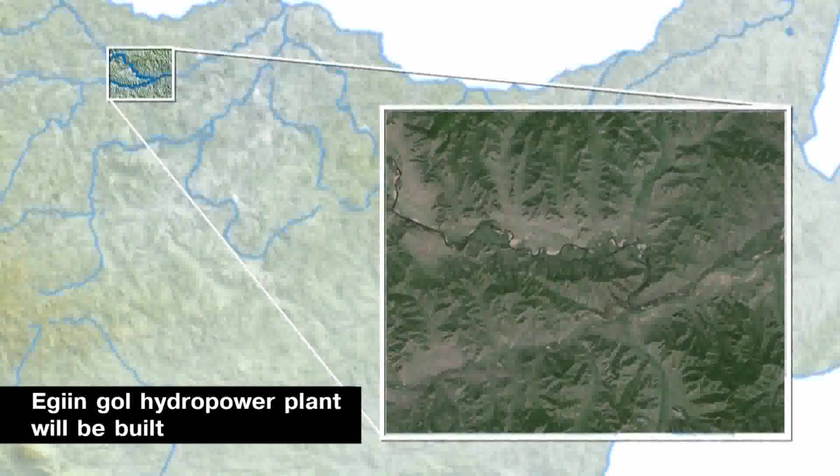The history of this project first started from the conclusion drawn by the Institute of the Russian Federation in 1964 to 1965 to build a HPP at 28 sites in Mongolia. One of them was at the end of the Egiin River, more than 450 kilometres from Ulaanbaatar in the territory of Khutag-Undur Sum, Bulgan province, located 2.5 kilometres upstream from the confluence of the Egiin and Selenge rivers, where this Egiin hydropower plant is planned to be constructed.

In 1997-1998, initiatives by Malaysia and Czechoslovakia to invest and construct a hydropower plant were not realised without being influenced by the Mongolian side. In 2007, an additional detailed environmental assessment was completed. A consortium of Sinomac and Kamaz companies participated in the tender, but decided to use the above-mentioned loan for other projects. On November 16, 2013, the Government of Mongolia decided to start construction of the Egiin hydropower plant.

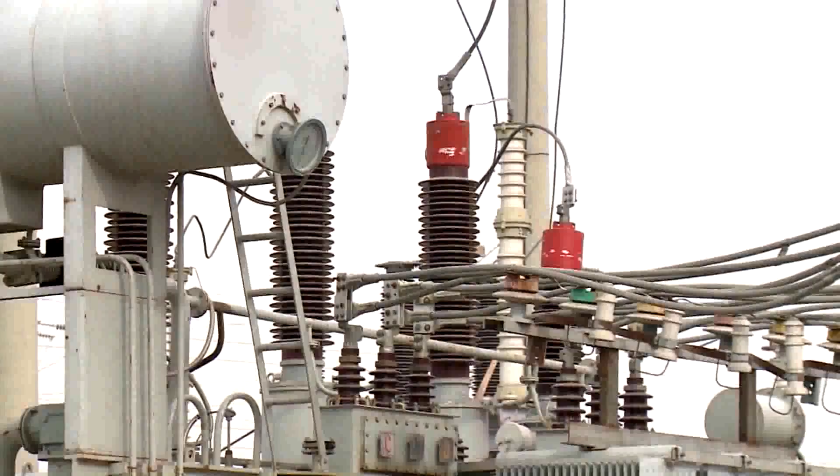Currently, daily peak load is 970 megawatts and the off-peak load is 650 megawatts. The difference is going up to 320 megawatts due to household-dominated electricity consumption growth. It is difficult to talk about independency of our energy system because we import expensive power needed for system regulation. Having constructed the EGPP, an independent power system of our country will be established in its real meaning, and we will be able to regulate our system and have reserve capacity.

The Federation has been increasing the price of electricity supplied from year to year. On average, we pay them US $24 to $25 million each year. Power Grid of the Central Energy System has already paid US $178.6 million to the Russian Federation for electricity imported from the Russian Federation in 1997-2015. If EGPP was constructed in 1997, the payment equivalent would be 64% of the construction cost of that time and would have been saved.

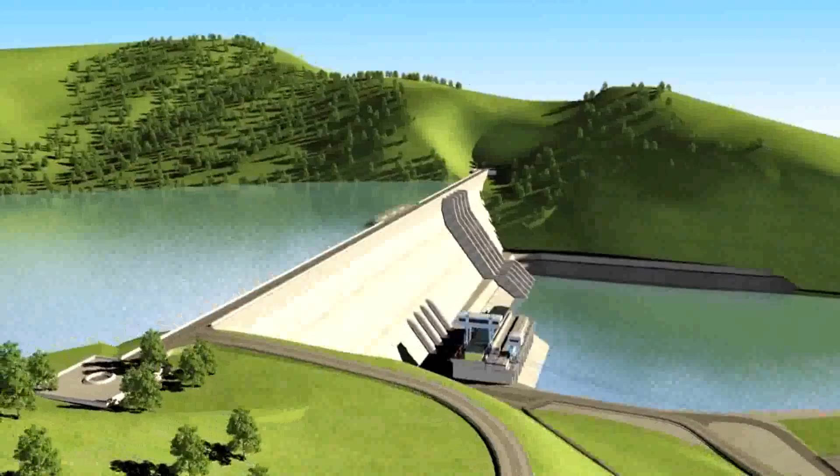After having constructed the 315 megawatt EGPP, it reduces raw coal consumption substantially and is of great importance to reduce greenhouse gases released into the air in Ulaanbaatar city, other towns and large suburban settlements by 709,000 tonnes per year.

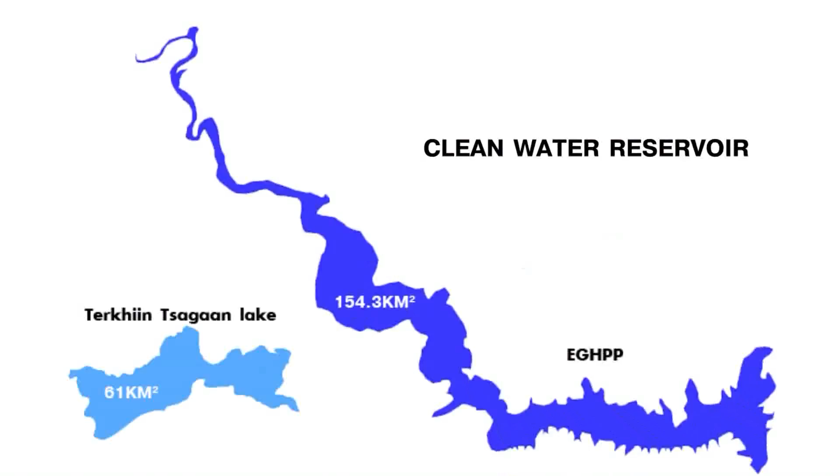Mongolia is one of the countries where desertification is intensified because within only the last decade more than 500 rivulets and creeks have dried up. Construction of the EGPP is a strategic project to ensure the nation's water supply security, creating clean water resources of 5.7 billion cubic metres volume, which is 2.5 times as big as Terkhiin Tsagaan Lake.

In fact, before 2013, there was no independent project unit, and specialists of the sectoral ministry were responsible in addition to their main job. The project unit consists of scholars, researchers and experts of all relevant fields. The historical obligation not to repeat lessons learnt and to successfully implement this project fell to the staff of the project unit.

The updated technical and economic feasibility study was carried out using US $1.5 million according to the agreement made in 2014 between the EGPP project unit and Tractebel Engineering France. But in 1992-1995, the technical and economic feasibility study was completed, funded by US $5.2 million, by Electrowatt LLC, Switzerland, Electroconsult LLC, Italy, and Uzny Airchim LLC, Mongolia. The reasons to update the previous technical and economic feasibility study completed in 1992-1995 are as follows.

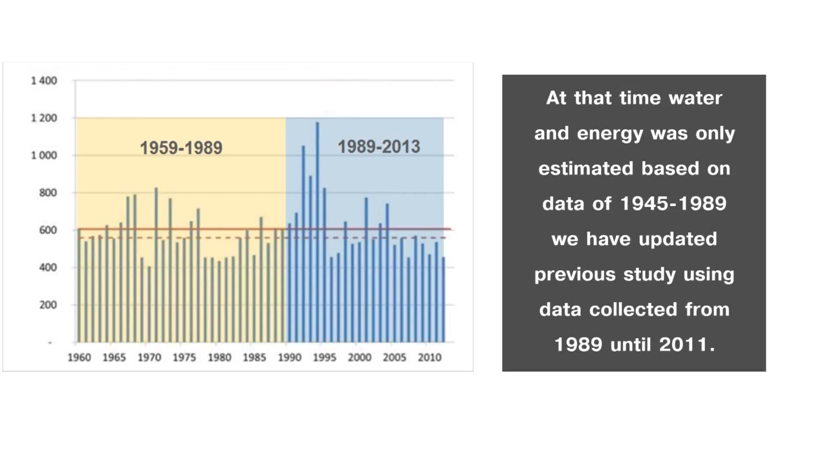Some studies were left out altogether. Apart from this, because at that time water and energy was only estimated based on the data of 1945 to 1989, we have updated the previous study using data collected from 1989 to 2011. The methodology used before for regional earthquake and seismicity studies was completely changed today.

In 2007, the total project cost was US$398.3 million, but it increased up to US$827.6 million in 2014, according to the updated technical and economic feasibility study. As a result of this calculation, the crest of the dam increased by 10 metres and the reservoir level also increased up to the level of 910 metres.

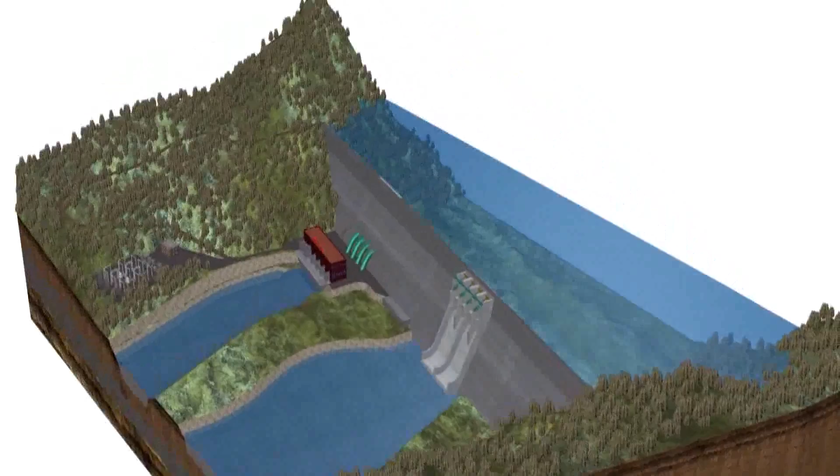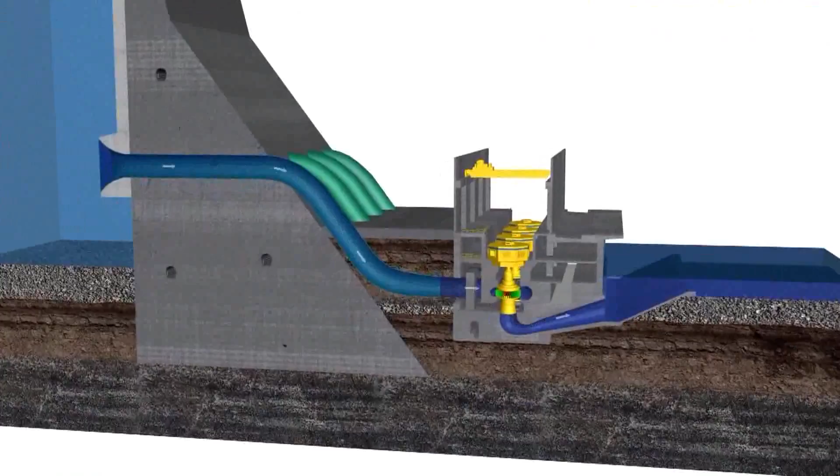By this way, installed capacity increased from 220 megawatts up to 315 megawatts. Thus, we became able to cover the winter peak load not by imported electric energy, but by the energy produced in Mongolia. In connection with the 43.2% increase of the HPP output, the dam cross-section increased by 30 metres in the dam crest, the height by 10 metres and the dam foundation by 80 metres, and the dam volume by 65.9% respectively. The dam volume became 910,000 cubic metres. All these became the main reason of increasing the project cost.

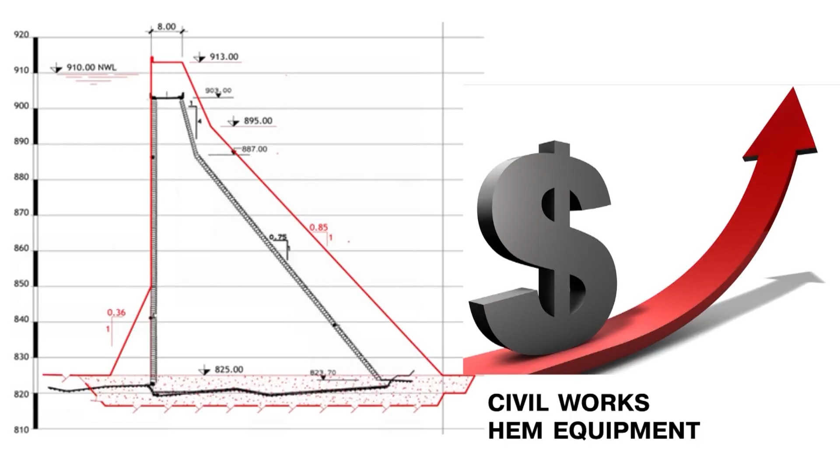At the same time, it was also an influential factor that the equipment cost has increased 3.1 times at the international market. Prediction of energy consumption estimate performed by the National Dispatching Centre showed that the peak capacity deficit of the central energy system will be over 300 megawatts in the next 5 years. Therefore, in the updated feasibility study, the project optimisation resulted in an installed capacity of 315 megawatts.

Tractebel Engineering LLC, project consulting company, made studies on potential hydrological impacts from the Egiin Gol hydropower plant project on Selenge River and Baikal Lake water regimes by 2 stages, making calculations considering reservoir filling and operation periods. Operation of the Egiin Gol hydropower plant will not cause any impact on annual inflow to the lake of Baikal.

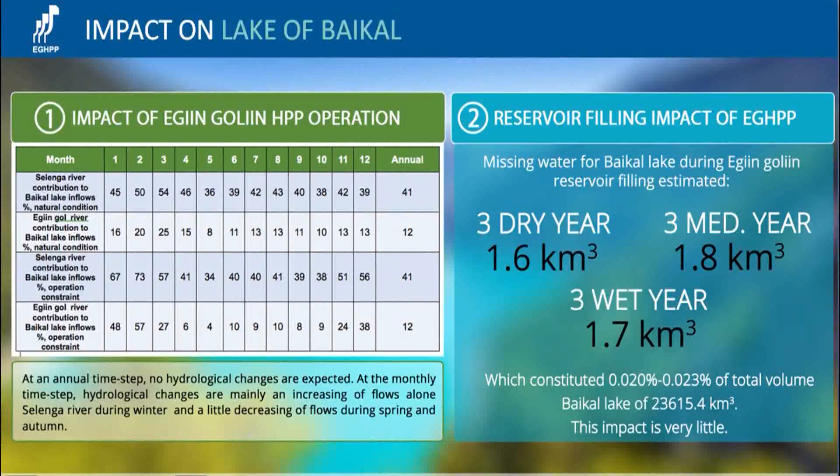Final conclusion was that annual hydrological impact to the Baikal Lake water volume during reservoir filling period or through 2 to 3 years after construction of the Egiin Gol hydropower plant is negligible, because this impact is equivalent with 0.020 to 0.023% of the Baikal Lake water volume.

Having implemented the Environmental Protection Management Plan, Environmental Monitoring and Analysis Program, measures and recommendations specified by above assessments, we will have opportunity to implement this project with minimum impact. Forest Research and Development Centre, SBE, of the MEGD conducted detailed studies of trees, bushes, shrubs covering the area. During the study, fallen and burnt trees were cleaned from 14 hectares and sapling trees transferred from 6 hectares of land.

Project unit operates within Taimen Conservation Fund that has ample research study experience at the Egiin Gol River, led by Director Mendsaikhan, Senior Researcher of the Institute of Geoecology of Mongolian Academy of Sciences, and Director Olaf Jensen, Professor of Rutgers University, USA. Pre-construction period, construction period and operation period. It is planned to conduct fish study for 5 to 7 years, taking into account the above mentioned 3 main periods. Detailed research study includes fish movement, food content, habitat, genetic construction and other studies within 100 kilometres of Egiin Gol and Selenge River catchment area.

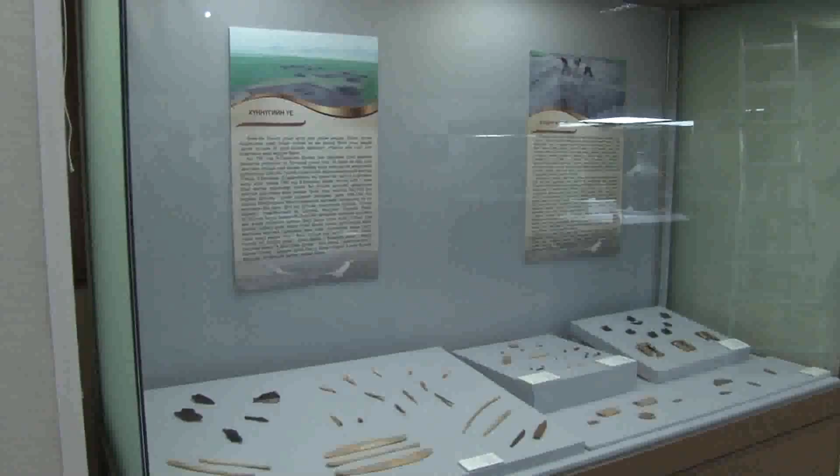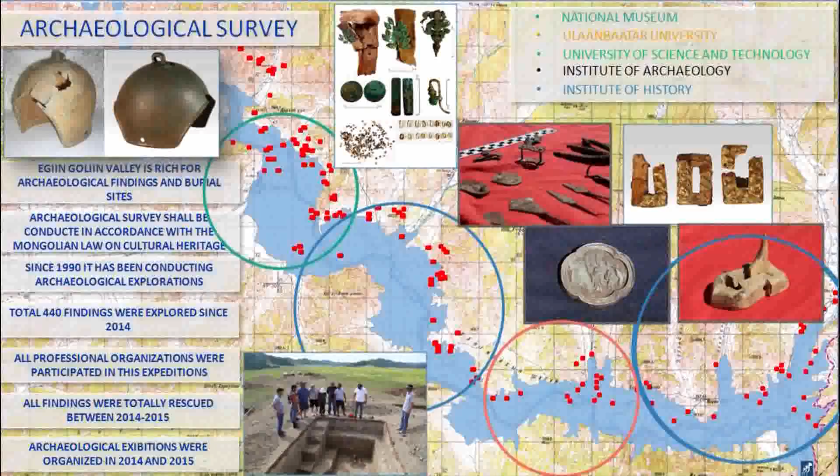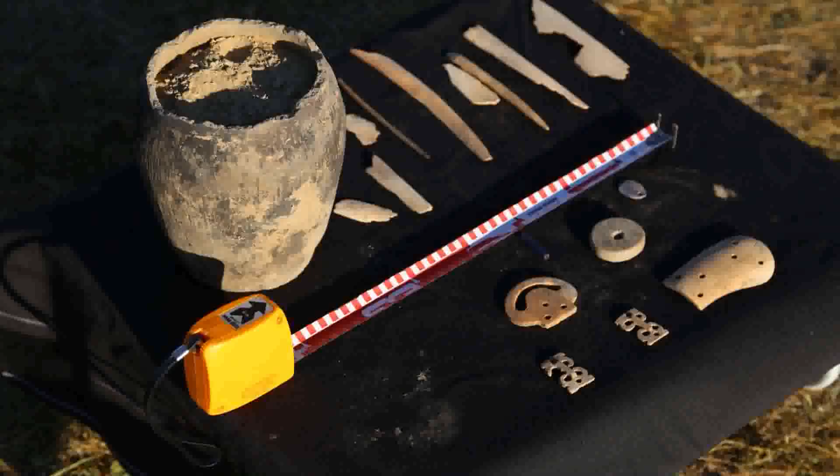Archaeological team consists of scientists and researchers from the Institute of Archaeology of the Mongolian Academy of Sciences, National Museum and the universities and institutes, conducted surveys and exploration in cooperation with specialists of the Egiin Gol project unit for 2 years and found in total more than 400 findings. Archaeological exhibitions were organised in the main hall of the National Museum, showing exhibits starting from rare and eye-catching ones not studied before, including Stone Age, Hun period, as well as exhibits related to the 13th century to the public.

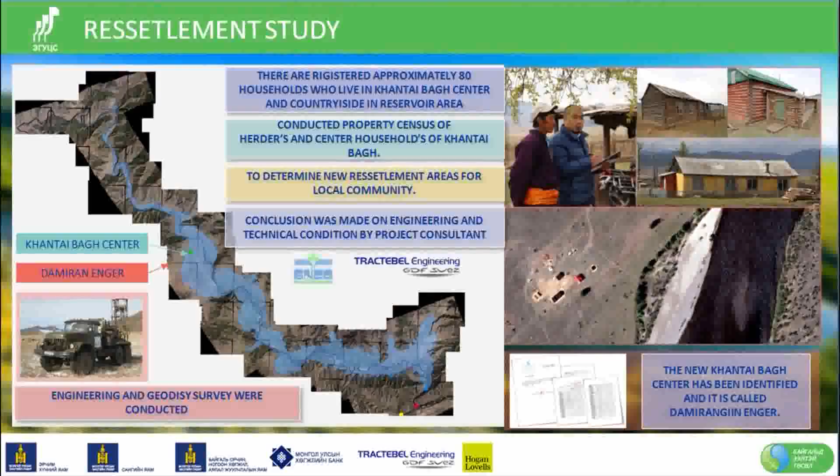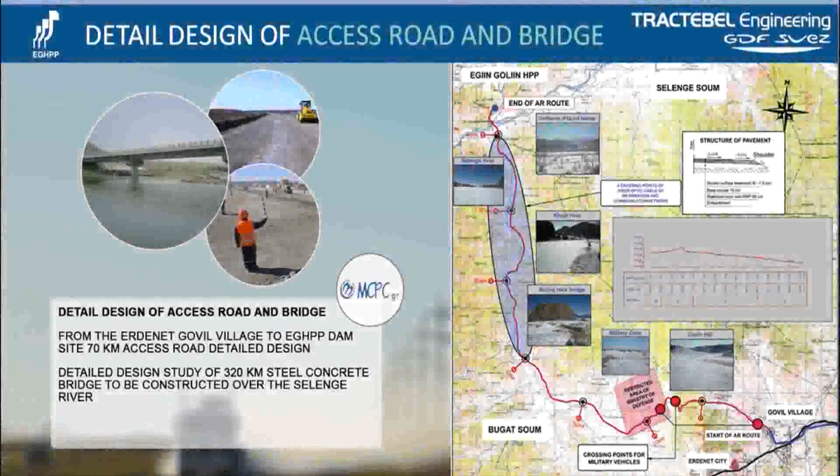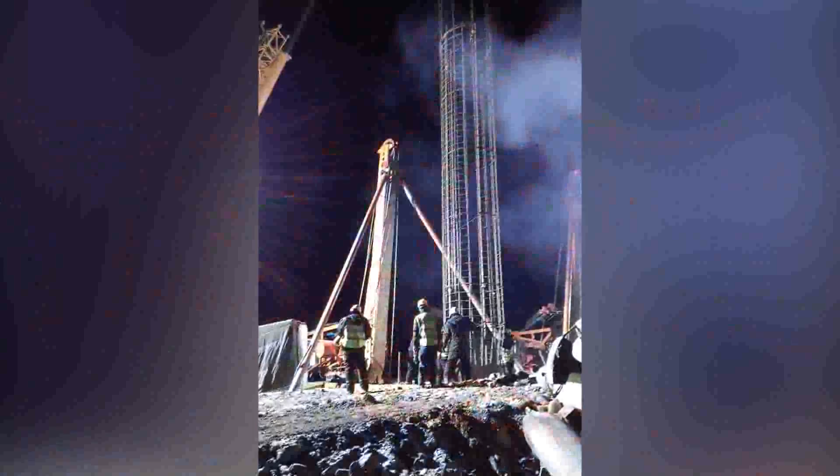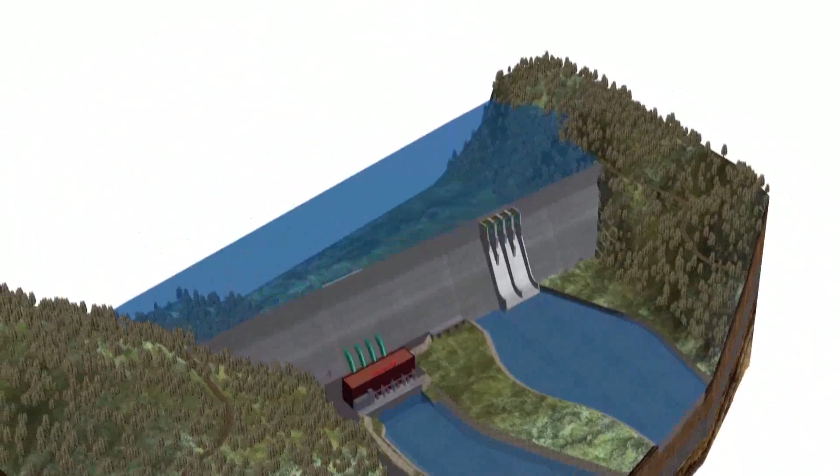National Development Authority, Government Implementation Agency, signed an agreement in October 2015 with Gezhouba from China to perform preliminary infrastructure works required for construction of Egiin Gol hydropower plant as follows. I'd like to mention it again: if we could have constructed Egiin Gol hydropower plant 50 years earlier, when its study was first completed, how much benefit Mongolia could have enjoyed until today.

First of all, constructing the Egiin Gol HPP will create a clean water resource of 5.7 billion cubic metres, preventing desertification, and also creates favourable conditions for land farming, fisheries, aquatic fauna, birds, water sports, and for the development of local and foreign tourism. This is an environmentally friendly project which is of great significance for local economic development. Egiin Gol HPP is able to keep tariffs and prices sustainable, competitive, becoming a firm basis for development of industrial production and provision of services.

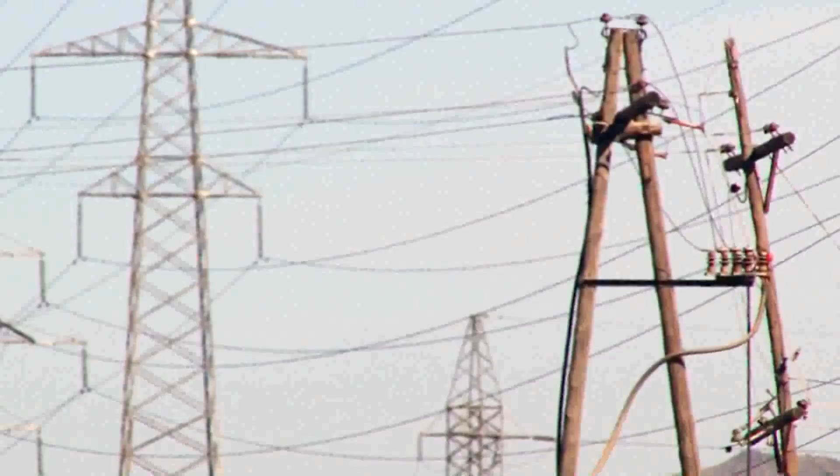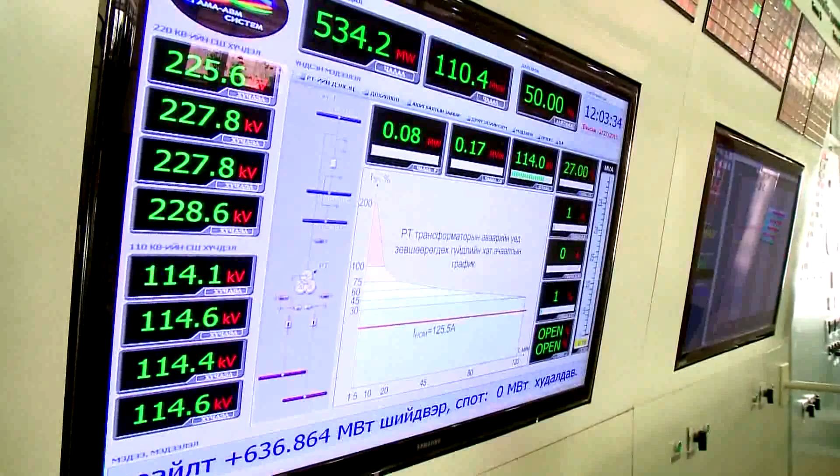Considering technology, coal-fired power stations operate in base load regime and manoeuvring capability is low. Ramp-up speed is slow and technical capability to operate as a system operator is too limited. All such technical difficulties will be fully solved by the Egiin Gol HPP. Therefore, only Egiin Gol HPP is capable of ensuring independent, stable and reliable operation of the energy system of our country and also regulation of the system. Mongolia would not have energy dependency and could have established an energy system which ensures independent, reliable and stable energy supply. Because of this, construction of the HPP has become a vital strategic task for each government of our country.